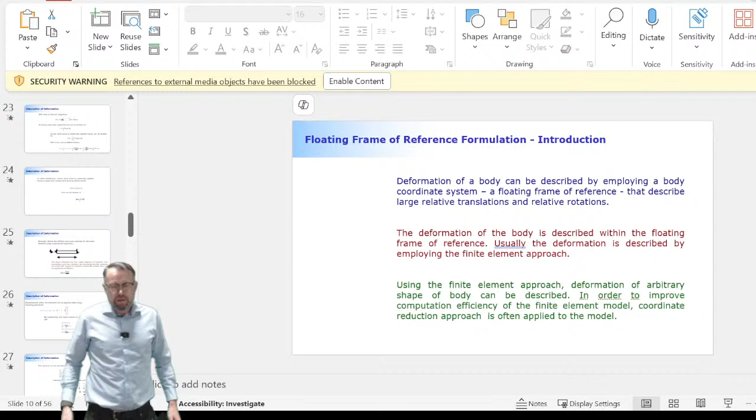Time online. Can you start sharing? This one. And is dock 1. How is it? The voice is good. In the meantime, can you stand up so that... Sure. Is it okay? Yeah, look so. Maybe you can lift that a bit more, so it's going to be like this one only. Yeah, okay, it looks good. Is everything okay? Yeah, everything seems to be okay. I'll just go grab something.

So, I have checked it. Everything seems to be in order except that I'm unable to display my screen to you guys. But these projectors, I think they're not even on. So we're good to go except that I'm unable to display my screen to you guys. Why not? So Mustafa left. Wireless. Okay, dock 1.

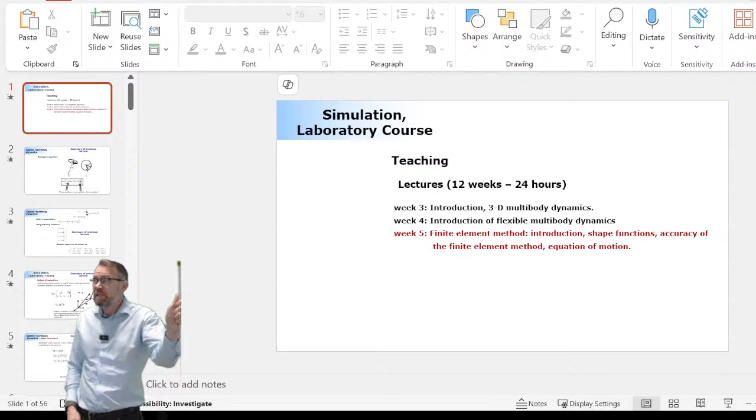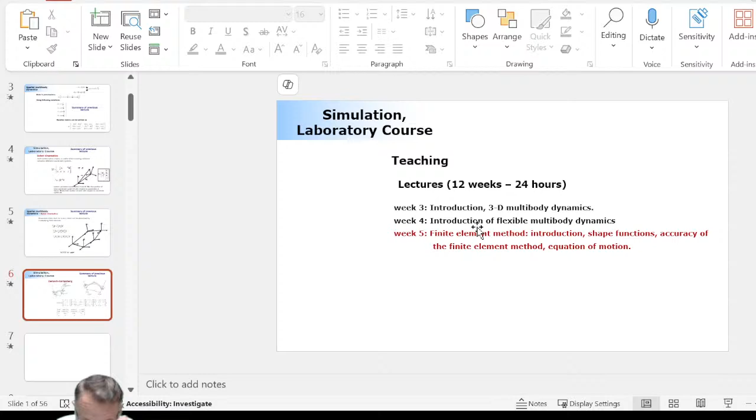The slides are frozen. So starting from where? The first page. First page. Okay, so let me take a look. Discard. It looks okay here. So let me put this back. So was it? Now it's okay now. Okay, but I need to detach this. Put it back. And like this. How it displays. Now I can see your cursor moves around. Your mouse, I can see it moves around. Okay. Here. Can you see this?

So is it moving? No, it's still on that. Still in this one, yes, but there is a delay. How come it's not in this presentation mode? Because everything else seems to be okay. So what if I do this? Is it somehow the video capture device? Everything should be okay here. As far as I can see, I don't see any difficulties here at all. No, this is what I don't want to do.

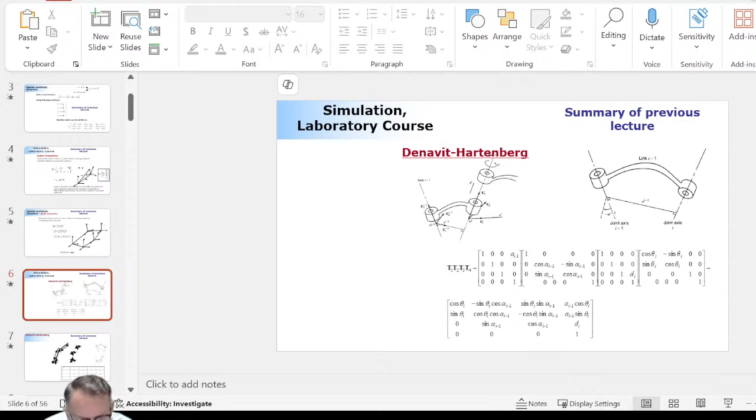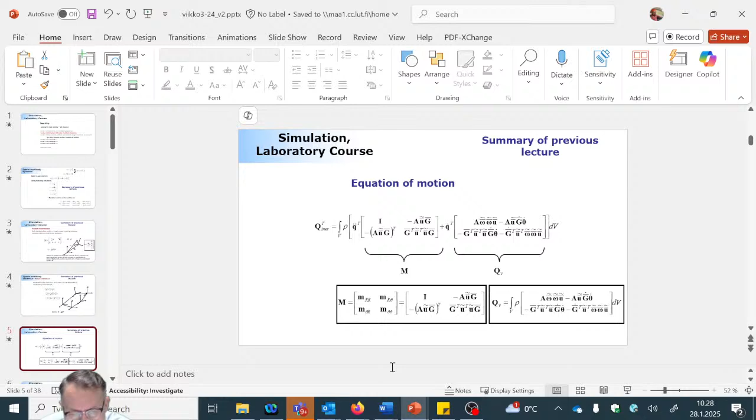Okay, so one more time. What is it you can see there? Denavit-Hartenberg. How come it's possible? Because my slide is completely different. So what is it you see now? Still the same. Okay, guys, sorry about this. So it seems that we are not able to somehow change the slides in PowerPoint. So the OBS is somehow video capture device. Display, what if I do the display capture like this? Window. Okay. How about now? I can see OBS. Now it's okay. Yep. Okay.

Okay, guys, sorry about that. I know it is a little bit annoying that every now and then I'm facing these difficulties in YouTube streaming, but I still want to go with YouTube because I feel it is superior. Another day I was checking my lectures, which I usually never do, and it's so convenient that you can put the closed captioning on. Even though I have an accent, it understands my English almost perfectly. And you can put the closed captioning to any language you want, including Finnish or German.

And it's still not displaying. Why? It was good a moment ago. It's somehow very unstable today. So it's again dark. I think it is somehow related to this display thing, that when I put it in this overhead projector, it's getting confused. So let's use this one more time. All right, like this. How does it look at the moment? Robot kinematics. Okay. Now it's fine. I think it is related to this projector business somehow.

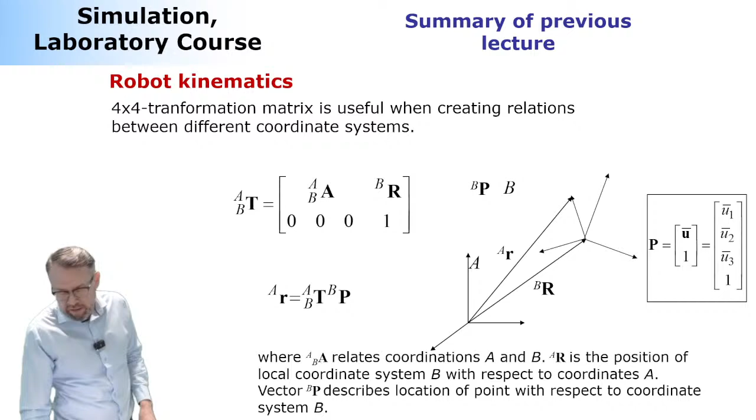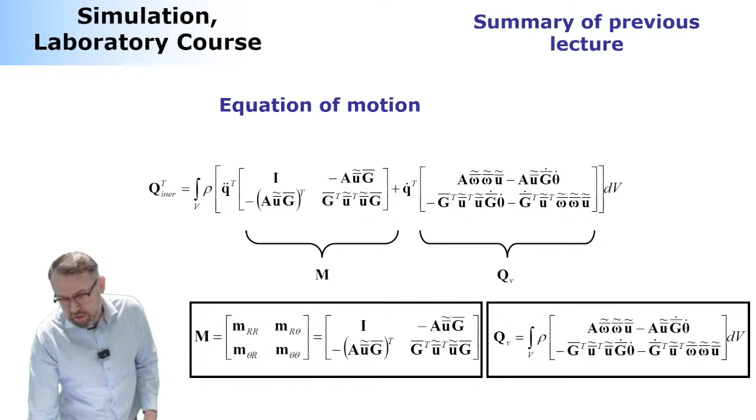So we were here to explain the 4x4 transformation matrix, and we concluded that you can create the kinematics based on that in a very straightforward manner. I'm going to revisit the subject matter a little later. We learned that we can relate the angular velocity vector and time derivatives of generalized rotational parameters with help of the G-matrix. The G-matrix is very pleasant in terms of usage in dynamic engines. It's needed because otherwise you'd have to express your inertia parameters, including your inertia tensor, using 4 parameters if you're using Euler parameters, and that's mission impossible for human brains. I'm going to revisit this just before we summarize our knowledge for the midterm exam.

Okay, but what I wanted to do today is this. Let's jump into the method called the floating frame of reference formulation. This is a great method used extensively in industrial applications and in most industrial companies, also in Finland. It allows you to describe deformation of bodies. How does it work? We're combining two methods: multi-body system dynamics and the finite-element method. In theory, if you are not happy with the finite-element method, you can combine this with something else, but in practice it's always the finite-element method. So that's what we're going to take a look at.

And we're going to make a short visit to the background of the finite-element method, how it actually works, because in order to understand the theory fully, it's good to be aware of it. All right, so this is something we discussed a little earlier. The floating frame of reference formulation is a method where there are large relative translation and rotation. That is described by the body reference coordinate system, using multi-body system dynamics. Sometimes this is referred to as large rigid body motion.

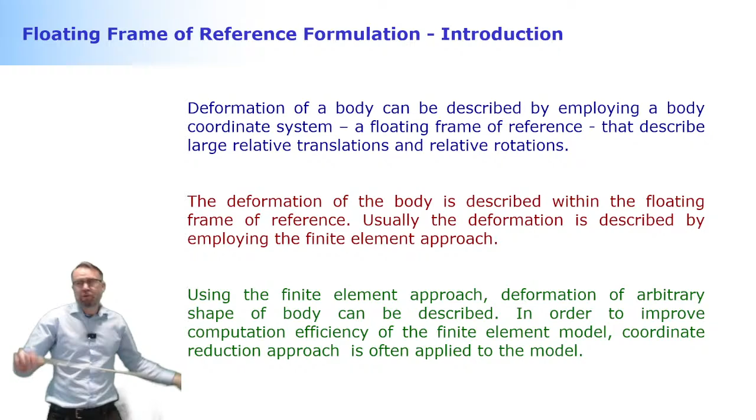The deformation that is superimposed on this large motion will be accounted for by using the finite-element method. And that's the way we can make use of the most positive things of the two methods. The finite-element method is very good at describing relative deformation with respect to a reference frame, whereas multi-body system dynamics is very good at describing large reference motion, rigid body motion, if you may. Okay, so that's how it goes.

And where this name floating is coming from, we're gonna get to a little later. But the theory goes like this. Remember, when we looked at the kinematics, we wanted to describe the kinematics using the body reference coordinate system, which is located here. So we're gonna first take the translation of the body reference coordinate system into account with help of our good friend called vector R. And then we're going to take the orientation of the body reference coordinate system into account by using the 3x3 rotation matrix that you can describe by using Euler angles, Euler parameters, whatever means you want.

And then comes something that we have not discussed earlier. We're going to describe an arbitrary particle by first taking its location into account using the position related to the undeformed configuration. When there's no deformation whatsoever, that's described by U bar 0. And then comes the last component that takes the deformation of this particular point into account. This deformation, of course, is a function of time and will be described by the vector U bar F. U bar F is the one that is actually coming from the finite-element method.

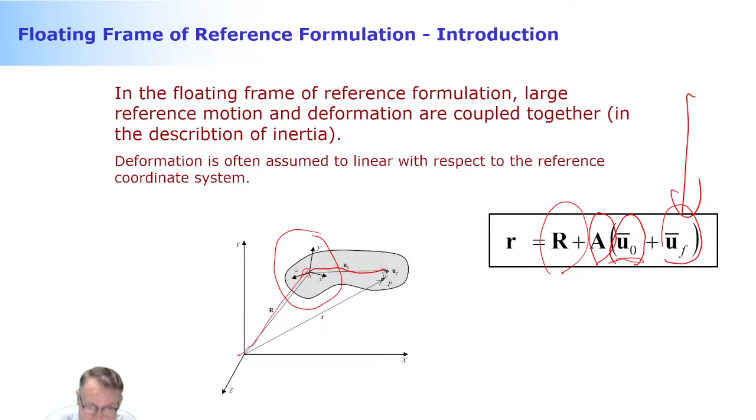Okay, so what's new compared to what it was a while ago? The new thing is this component here. Nothing else. And this new component is coming from the finite-element method, and it is describing deformation, displacement. So basically, if you think about a cantilever beam, when you're imposing force on it, the displacement is how much each given point of the cantilever beam has moved. So this is going to be vector U bar F. You know that this kind of deformation you can describe, or compute, using the finite-element method.

All right, here comes something very important. What we did in the case of rigid bodies, we took each of the particles into account by using volume integrals. We integrated over the volume of the body, and that's the way we were able to take all these infinite number of particles into account. When we are discussing deformable bodies, that's no longer possible because there is, first of all, an infinite number of particles and an infinite number of motion possibilities for each of the particles. And this is not going to be computationally possible any longer.

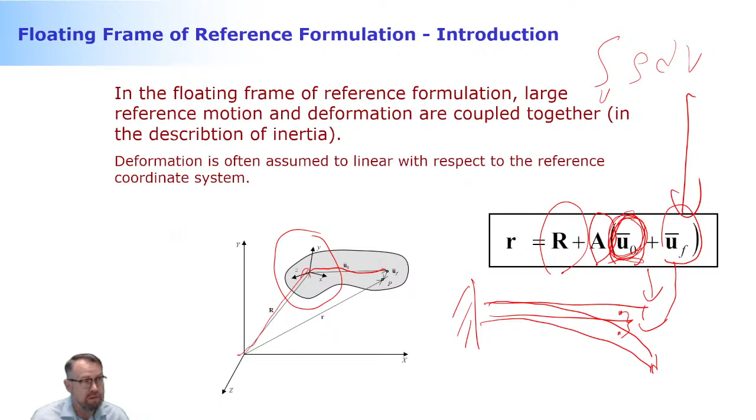What we need to do is limit ourselves to a certain number of motions, a certain number of ways that the deformation can take place. We still can take each of the particles into account, but the way they can deform needs to be limited, simply because we don't have the computational resources to take that into account. That's the reason behind it. Okay, so that's what we're gonna do.

And again, it goes like this. Here is the equation of motion that is used in multi-body system dynamics. And look at what we have here. We have these generalized coordinates which describe the reference translation and rotation, and Lagrange multipliers that take the constraints into account. So this is going to be our vector of unknowns. This is going to be supplemented by the finite element method, and in the finite element method we wanted to solve this vector as a function of time. That's what we wanted to do. How does that sound? The big picture is pretty clear, isn't it?

There's one big problem here, which we're going to revisit later, if not today, then a little later during the course. And this big problem is this: the typical size of a finite element model is enormous. It is not unusual that the finite element model describing one single body consists of 10,000 degrees of freedom, 100,000 degrees of freedom, 1 million degrees of freedom. So it means that the vector u bar f is very big, consists of a very large number of components.

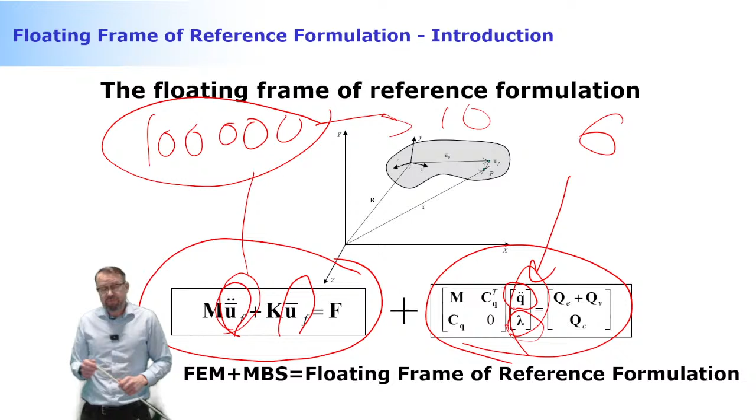Of course, there is a price we need to pay, and the price is that accuracy is not as great as it was with 100,000 degrees of freedom. But it's surprising that with this modal reduction technique, accuracy is compromised only a very little. So it's something that in engineering applications we can live with fine, even when we go down to 10 degrees of freedom. This is going to take place by using this modal reduction method, and we're going to learn to use it with the help of eigenvalue analysis. And eigenvalue analysis is more about the structural properties, the relation between stiffness and mass.

Okay, any comments, questions so far? How do things appear to be? Is it making sense, or does none of this stuff make any sense? It feels like we look at the same equations in different classes. This is good, but I feel like that's pedagogical. It is. This is the whole purpose. So you learn this in Jussi Sopanen's class, and then in Marko Matikainen's class. So do you guys have a feeling that you are not making any progress whatsoever, because moving from one class to another, the same equation comes again and again? Which is great. I know you're thinking, why is this such a big deal? But once you understand the nature of this technology, everything is going to be easier after that.

So one more time, there's Sopanen's class, and then control system. Control system, what course is this? Machine Dynamics. But what is the other course? This is something I'm not familiar with. In control, there's eigenvalue analysis to find the stability. Right, but is it for rigid bodies or flexible bodies? I think it is for rigid bodies. So it's a little different story, but again, a little bit the same story too. Okay, how this all comes together. Hopefully you'll feel super strong after you have heard these stories. What he is explaining is more or less the same.

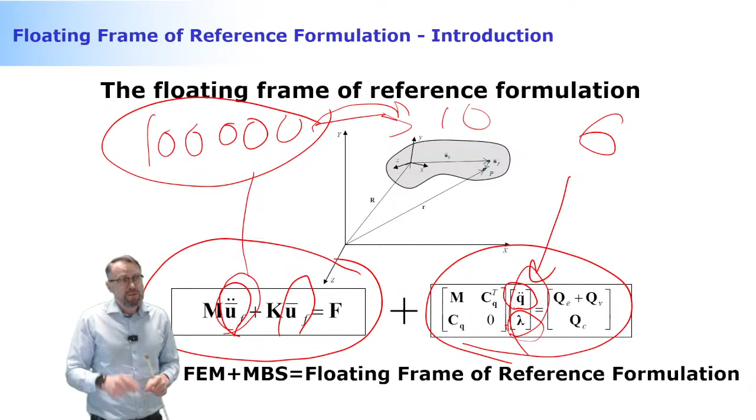He is moving from one space to another, because moving from 100,000 degrees of freedom to 10 degrees of freedom is moving from one space to another space. So this is a space mapping. By the way, his middle name is space mapping, you know that. He's very, very good at that. So Sopanen uses space mapping, mapping from one space to another all the time. Here we don't do that much mapping, but a little bit too.

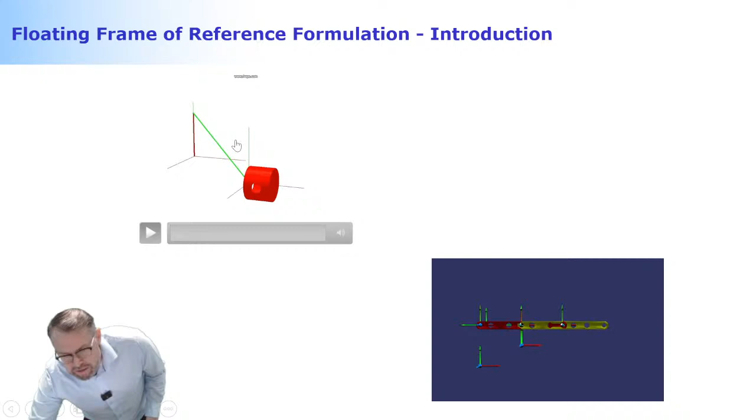Okay, so here are a few examples of the floating frame of reference formulation that I haven't shown you earlier. These are the early developments we made. This is a three-dimensional crankshaft, and you see that the connecting rod is a flexible body, just for testing purposes. When we were about to look at the floating frame of reference formulation in detail, these kinds of exercises were used.

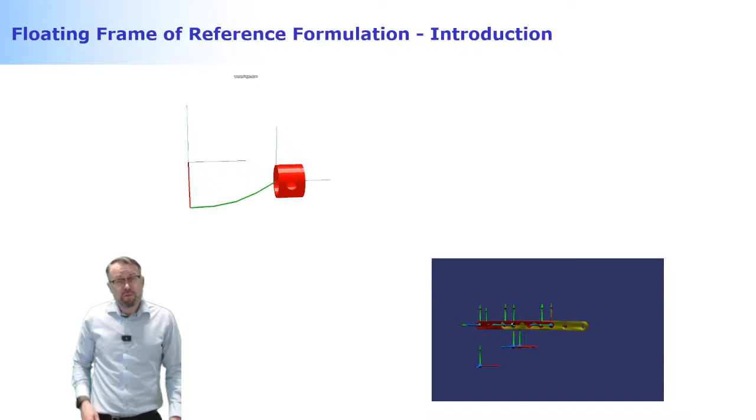And this is another system where there's a telescope joint, which even today is a little difficult to model using this technology, for reasons we're going to get back to a little later. But you see that it looks pretty realistic, so it's not too much off. Okay, deformation, U. How can you describe this U bar? It was called U bar F.

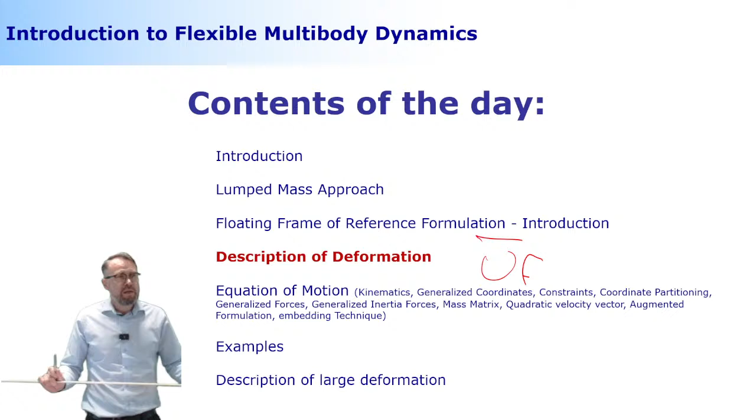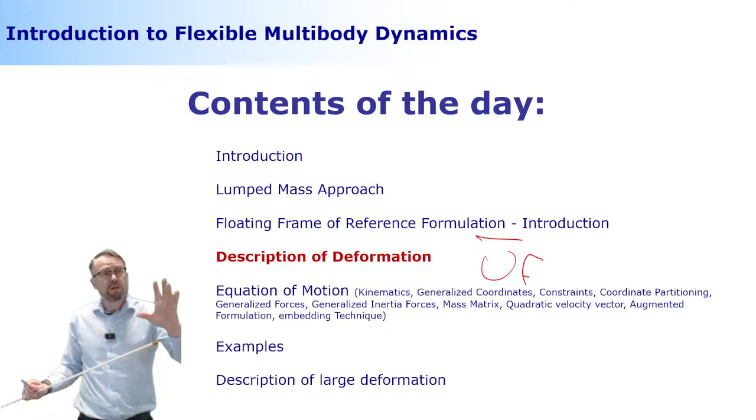For sake of simplicity, we're going to start calling this U. This U is always going to be with respect to a reference coordinate system that takes large translation and rotation into account. From this point on, we're going to look at how the deformation can be described, without making any comments about whether that coordinate system is moving or not.

We're going to look at the finite element method, which is extensively used and very general, applying to multiple different engineering areas. Here we're going to use a displacement-based finite element method, meaning the unknowns will be displacements. There are other methods, such as in fluid analysis, or mixed finite element methods where unknowns include quantities like stresses and displacements simultaneously, giving slightly better approximations of both.

But now we're going to look at something displacement-based, focused on U - how much or how well we can describe deformation. The method itself is pretty simple.

You take your structure and divide it into what are called elements. These elements are connected to points that are called nodes. The more elements you have, the better solution you get.

This is the nature of an approximate method. Typically, when you have a low number of elements, your solution is not great. It gets better and better as you increase the number of elements. This is called convergency, or convergency rate.

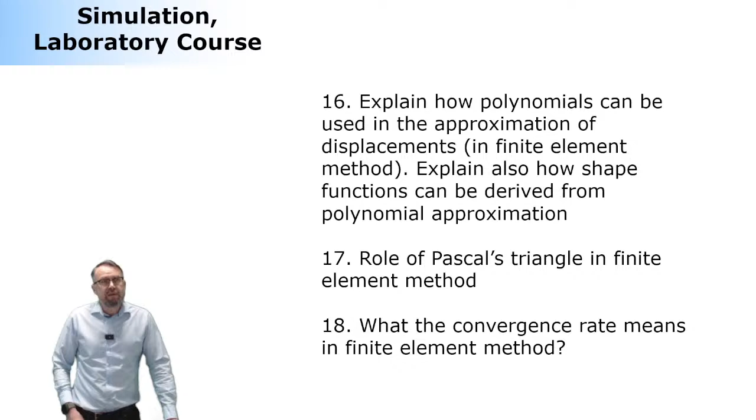We're going to take a look at polynomials, because we can take each of the particles in flexible bodies into account, and how we do that using the finite element method is based on polynomials. Related to polynomials is Pascal's triangle - what's the deal with that? And we'll look at convergence rate - how fast you can get a solution you're happy with.

Now let's get started from the very simple element - the spring element. A spring element consists of two nodes, two points at both ends of the spring element. These nodes can be located where you're combining one element to another, but they can also be located inside the element. It's very possible to have one node in the middle, or even three nodes in the middle.

This is possible too. This element is something that this one node, U1, can move back and forth in the x-axis direction. Nothing but motion like this. Here's another node with the same kind of degrees of freedom. Each of these points consists of 1 degree of freedom, meaning there's only one way they can move. They can move positively or negatively, which is another direction.

Now comes something extremely important. We wanted to learn how is the behavior between these nodes. This is the nature of the finite element method. We really want to know how each of the particles, and there are infinite numbers of them, are moving between these two extreme nodal points. That's what the finite element method is about.

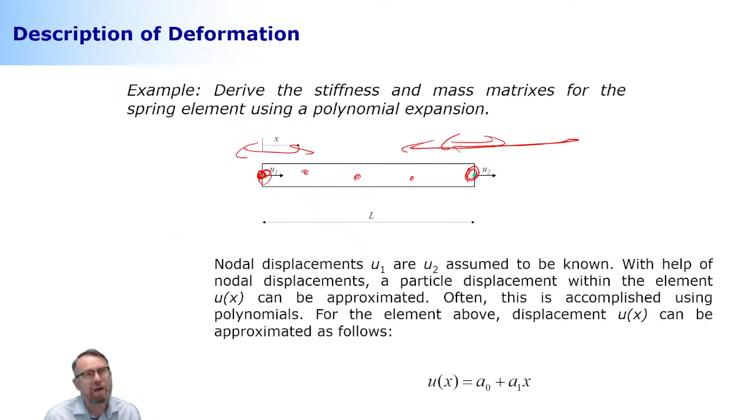So what can we do? We can approximate these pretty much any way we want, and there are many ways to do that, but the most common way is using polynomials. A polynomial describes the internal life between these nodes. Let me emphasize again, finite element method is all about how is the life between these nodes. That's what we're interested in. This gives us the feature of each component that will later be used to compute displacement, stiffness matrix, mass matrix, and so forth. How is the life between?

Now it's going to be pretty simple. We have one node here, another node here, so we have a total of 2 degrees of freedom system. The way we can approximate this using a polynomial is this: a continuous function that is a function of x. This continuous function consists of two components, A0 and A1, and A1 is multiplied by x.

Now how would things be different if I added one more node here in the middle? It would be 3 nodes, so it would be a 3 degrees of freedom element. What should I do to describe an element like that? I should add one more component, A2, multiplied by the next polynomial term, which is x power 2.

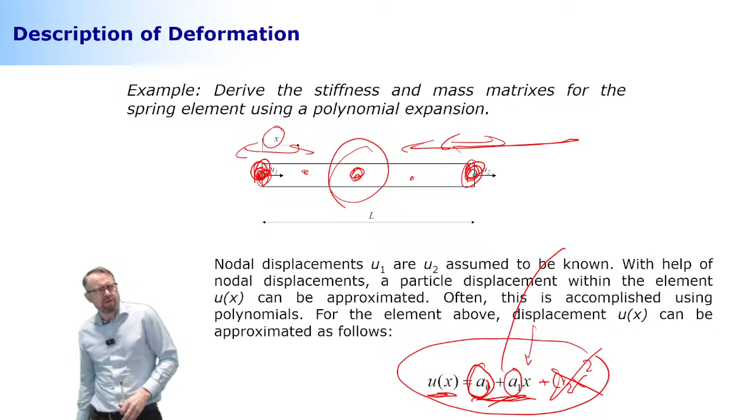How can we make things happen? Maybe we can make use of the information we have about how the nodes are located, and use this information to create something where the polynomial unknowns are replaced by nodal degrees of freedom. It goes like this: I'm going to express this polynomial using two vectors, one of polynomial coefficients, another of my unknowns. Let me emphasize, you could take these A's and go all the way to the stiffness matrix and solve the problem using these unknowns, but again, they have no clear physical interpretation. So it makes sense to do a certain level of manipulation here in the beginning, at a kinematic level.

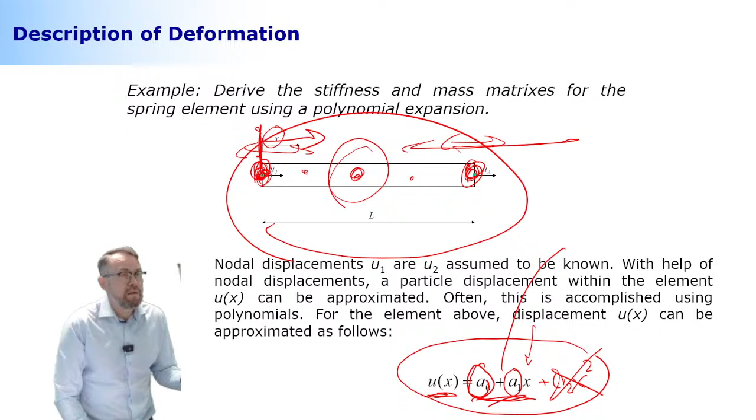What do we know? We know that the first node is located where x is equal to 0. How do I know that? Because when I look at this x coordinate system, it starts here, so it's located where x equals 0. How is it going to look if I substitute that information into my polynomial? If it's originally written like this, and you substitute 0 here, this component will disappear. What is left is this one.

All right, then I will do the same, but this time x is equal to L, because I know that the next node is located at position L with respect to the origin of the coordinate system x. So this is going to be my substitution. So what if I'm going to express this similarly to this one using...

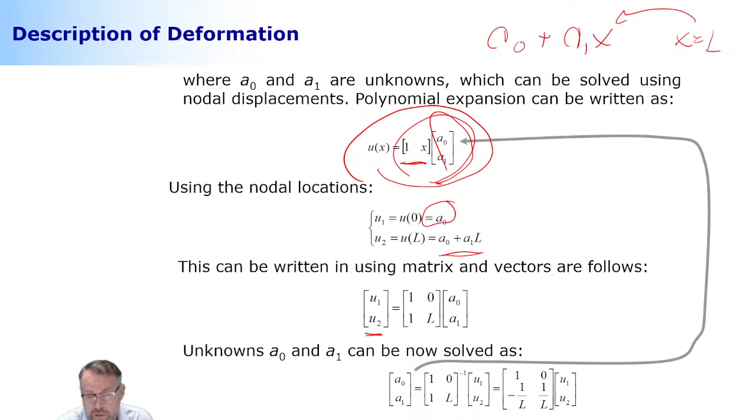the matrix notation. So U1, U2 can be expressed using these unknowns, the A's, and then something that is a matrix that we're very much interested in. Now, the only thing left here is to solve this and substitute that back. And then we're going to understand how each of the particles between these nodes is behaving. To make that happen, I need to invert this, which is a 2 by 2 matrix.

Let me tell you a horror story. When I was a postdoctoral student at the University of Illinois at Chicago, UIC, one of the first things that was my responsibility was to create the shape function matrix, the same thing that I'm doing here, for an element that had a total of 48 degrees of freedom.

I'm never going to forget the number 48. Instead of 2 degrees of freedom like we have here, it was actually 48 degrees of freedom. So what does that mean? It means that this matrix here wasn't 2 by 2, but 48 by 48. So it's much bigger than that.

Seemingly simple approach to do, because already back then, when I was younger, I had access to symbolic math tools. So I was able to use the symbolic math tools to create this, and more importantly, invert it, because otherwise inverting this by pen and paper, inverting a 48 by 48 matrix, no go. No human can do that. Maybe somebody can, but you'd need to devote a lifetime to do it once.

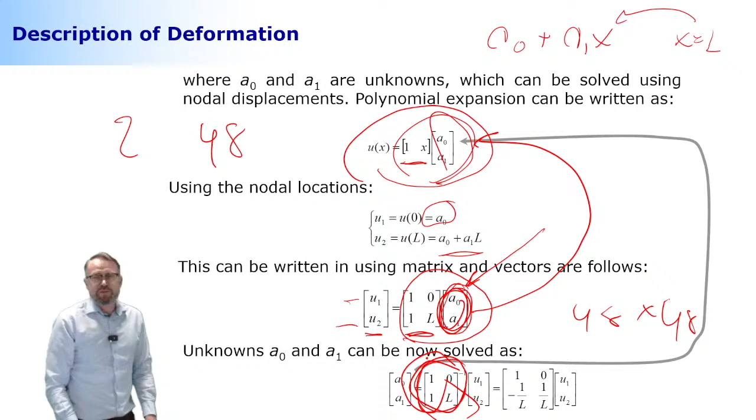All right, so you don't need to struggle with anything like that. Once I do the math, once I do the substitution, I'm going to get 2 components. I'm going to get the vector of 2 components, and these 2 components are continuous functions - continuous functions that tell me how each particle is moving if I make a move of one of these nodal degrees of freedom. So this is the soul of the finite element method.

So let's look at this again. I have node 1 and node 2. If I move node 1, these shape functions - while I keep node 2 where it is - tell me how every single particle between these points is moving. And this is what the finite element method is all about.

I understand it's hard to understand this concept because we're speaking about an element that can only move back and forth at this nodal location. But if you move this one here by some amount, how do the particles that used to be located here move with respect to each other? And the motion is linear - you see there is linear behavior.

But not necessarily - this linearity comes from the fact that the polynomial I used was very simple. This becomes more clear when we look at this in a beam application, because in beams we have more degrees of freedom. But this is the soul of finite element method. If you don't know how each of the particles is traveling between these points, you would have no chance to use this in a proper way.

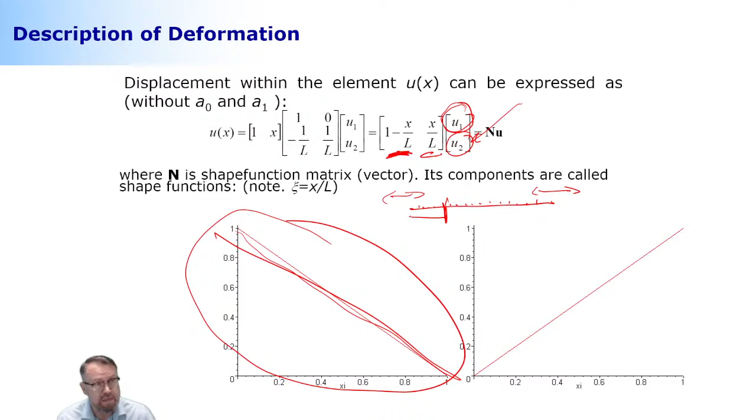Now, I say polynomials are most commonly used to create these shape functions, which is correct. But not necessarily. Some people are not happy with the polynomials. There is even technology that was somewhat in fashion a while ago, called isogeometric analysis. And isogeometric analysis, instead of using polynomials, uses NURBS, non-uniform rational B-splines. Why? Well, there's a clear reason.

Because one of the things that in real use of the finite element method takes most of the time is meshing. Meshing means that you have a geometry and you want to divide this geometry into elements. Of course, each of the commercial finite element programs has an automated way to make this happen. But usually you need to do this several times because there may be certain details that the meshing tool gets confused by. You're not able to make a proper mesh, so you need to go back and forth with your finite element and CAD software, and this usually takes more time than anything else.

And now when you look back, how does the CAD software describe the different geometries? They are based on NURBS, non-uniform rational B-splines. And now if you use NURBS in your finite element method, then the conversion from geometry to finite element mesh becomes more straightforward, and you can save time in the meshing phase. Other than that, everything works with no difference. So this is what is called isogeometric analysis.

Okay, so what next? Yes, sir. We now have a system with 2 degrees of freedom. If we have a system with 48, we get 48 of these diagrams, right? Yes. Okay.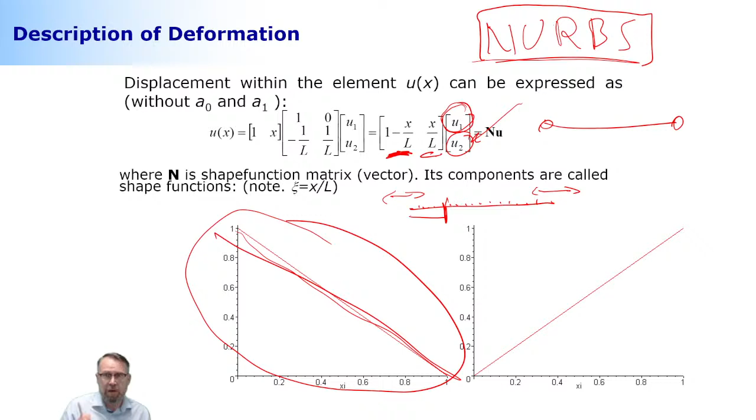Okay. Yeah, so this particular element here, even this one, you can make it 48 degrees of freedom, if you do it in a way that you have 48 nodes, so this becomes 48 times 48. Not necessarily making that much sense. And by the way, in the finite element method, something that is good for you to be aware of is that there are 2 different refinement methods. Like the one that I explained here.

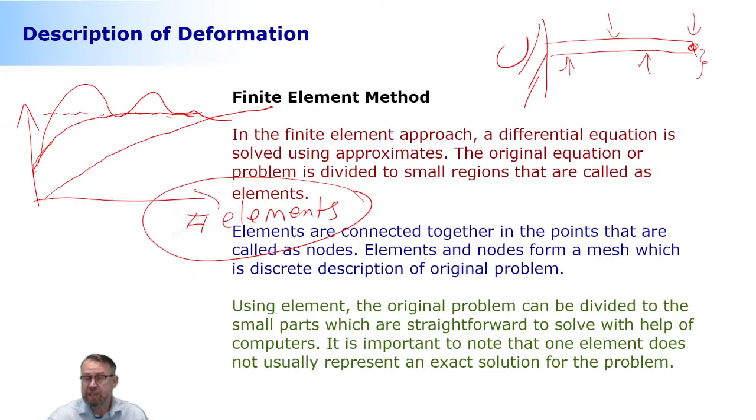I said that you can get a better and better solution if you increase the number of elements, which is correct. But you can also do it the other way around. You can also increase the degree within one single element. Now we use these linear polynomials. Instead of using linear polynomials, we can use more advanced polynomials and increase the complexity of one single element. These are called p and h refinement.

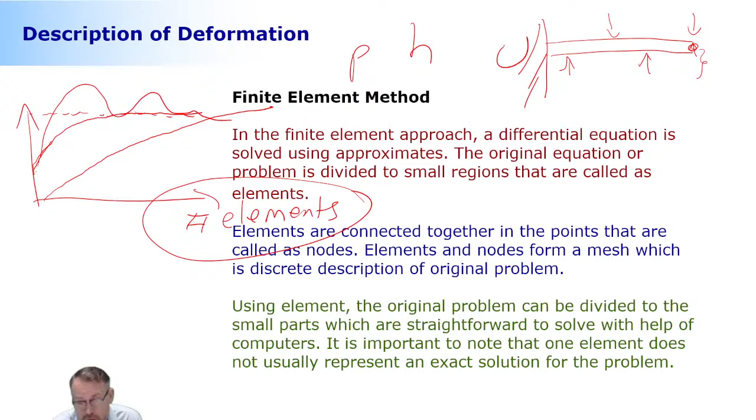P and h refinement. So if you look at the finite element literature, you can get a better solution in 2 alternative ways: increase the number of elements, or increase the degree within one element. More or less the same story. Both come with a computational burden; they both require more computational power. So it doesn't really matter how you do it, because it's going to increase the computation anyway. But p and h refinement, that's what it is called.

Okay, so I was here. Look at this. 4 nodes. If it is 4 nodes, how is the polynomial going to be? How can you select the polynomial if you have a configuration like shown here? It's going to be 1, 2, 3, 4 nodes. Each of the nodes has 1 degree of freedom. So go ahead and log yourself into Socrative and enter the answer. And the one who was saying that I'm unable to log in should be able to log in now.

So the one that was communicating with the big boy, big muscle, Mustafa. Because now if you call me big boss, I need to call you big muscles too. This is a 2-way road.

You know that. Okay, so which one is correct? Only one is correct. Only one can work in this configuration. Okay, which one works?

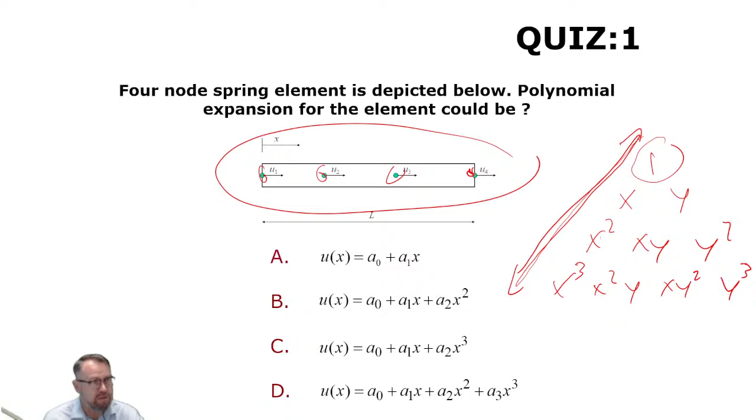Okay, now we are here in one dimension only. So in Pascal's triangle, we're using one line only, moving back and forth in this direction. So this is how we're selecting the polynomial components. The typical way to select the polynomial components is that you select this one, and you actually have to do it. If not selecting this one, the element is unable to describe large translation and rotation without introducing strains, and this is going to be physically incorrect. So you have to select that. This is a minimum component that you must have.

Second one here, if you have a line, you have to have the x, because otherwise the element is unable to express constant strain. And constant strain is another important feature, because even when you have a distribution that is a very, very complex form, you can always look at that in small pieces that are constant. And this is another requirement to make the element converge to the correct solution.

But then comes something surprising. Often these polynomials are selected, okay, the next one is this, and so on and so forth. But for some of the well-performing elements, you don't do the selection like this, but you skip some of them. That was, by the way, the story with the one where I was able to finally find the shape functions, the one that was based on 48 times 48. So it wasn't that I was selecting everything here, because that would be the easy thing to do. But it was this one, and this one, and then all of a sudden it works, and it's performing better than anything else.

And this is something that we're going to discuss a little later: conforming and non-conforming elements. The selection, like taking everything in a line, is a very obvious choice, but not necessarily getting the most efficient elements.

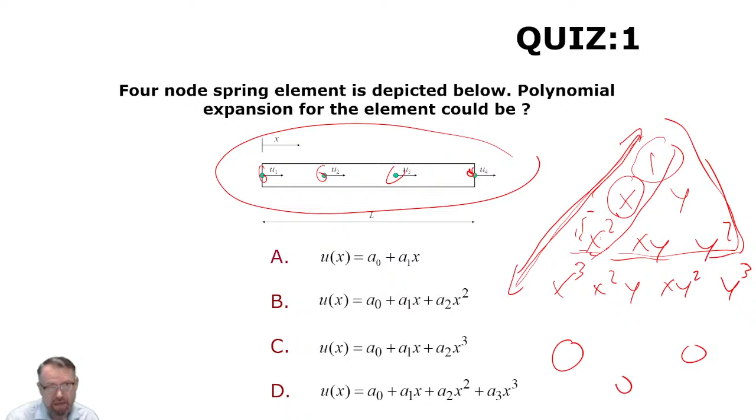Okay, I'm going to get back to this momentarily, but let's look at how we can describe the element then. This is something that I don't think is very important here to understand in detail. But what I wanted to do is express the equilibrium in a sense that I have here external applied forces and then the stress that I'm integrating over the boundaries of the element. This is a little complicated way to express the whole thing. But what I wanted to have here is strain, the strain vector. And I wanted to know how the displacement and strain are related. This is what I need to know to be able to create my stiffness matrix.

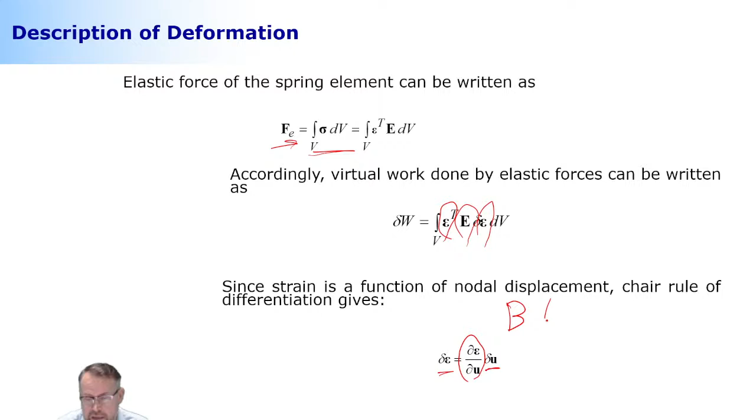The one here in the middle is going to be a matrix or scalar of elastic coefficients. Here is my strain vector again. The strain vector, in this case, can be obtained if you know your displacement, and this relates displacement and strain. This is typically called in finite element literature B, the kinematic matrix. The kinematic matrix relates displacement and strain. So if there's this amount of displacement, what that means in terms of strain.

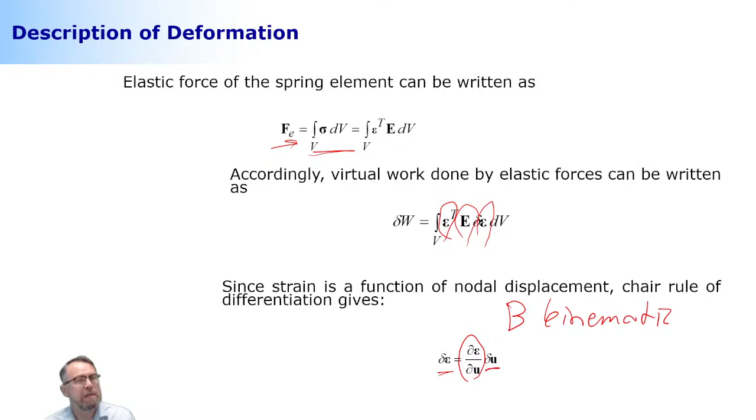All right, here the relation is this. I'm differentiating this vector u with respect to x. It's going to give me strain. And when I substitute the shape functions and degrees of freedom here, this is the way that relates my strain and displacement. This is the one that is called the kinematic matrix, doing this relation for me. Okay, so why is this important?

Because now if I have the displacement here, it tells me how is the strain, and the strain, again, is something that I must know in order to be able to express my stiffness matrix. I went a little fast here. I don't know if you guys have a little hard time to understand this, but the true nature of the finite element method is this kinematics. How you do this relation between the displacement and strain, this is very case dependent. And I would say that is less important than understanding the true nature that is based on polynomials.

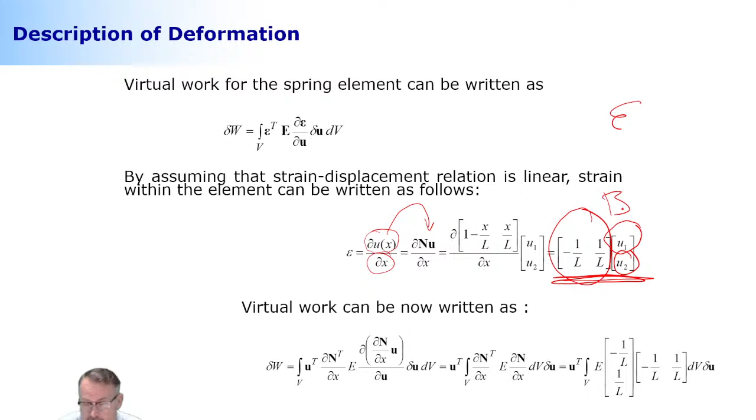Okay. Now, when I have this kinematic matrix and everything, once I finally compute everything and once I do the integration, what is going to be left is called the stiffness matrix. Now in a static finite element method, my stiffness matrix multiplied by displacement is going to be equal to externally applied forces. In finite element problems, we're solving this one. We're solving displacement by inverting the stiffness matrix and multiplying forces by the inverted stiffness matrix.

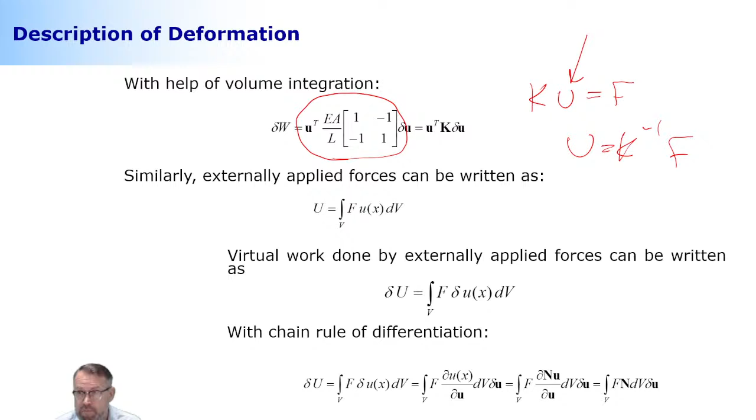Then you know the displacement, but displacement will be expressed in terms of nodal degrees of freedom. But with help of shape functions, we actually know how each of the particles is moving within the boundaries of the elements. Okay, we get back to this a little later, so we're going to look at this one more time.

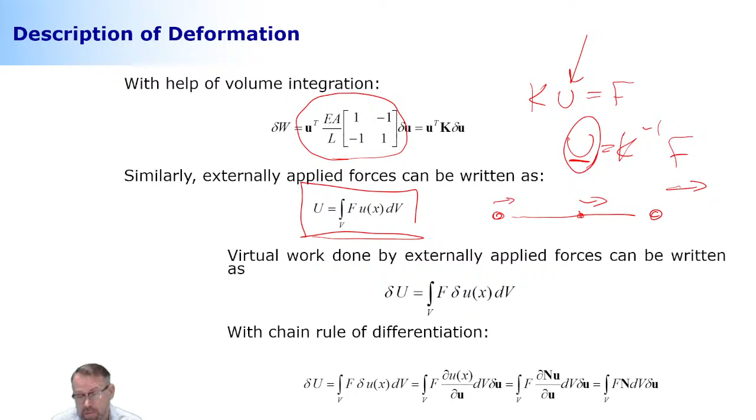And then one thing that is mentioned here is that these forces will be expressed in terms of nodal degrees of freedom, because your unknowns are these. So if you have nodes here, and the force is applied here, a place where there is no node, you need to share these forces to nodal degrees of freedom. And you can make that happen, again, with help of shape functions. Something that is less important here, but one of the minor things that is still very important to understand, like how you actually can make use of finite element models. All right, so this is finally what you get. So you're solving this one, which is a displacement.

I know for some reason I'm reluctant to have a break. I don't know why. Maybe because I'm not sure how well my ERC presentation is, but I think I need to do that. Okay, so what do you guys say? Let's have a break, and then after the break, 5 minutes, my presentation, and then we continue with this subject matter,

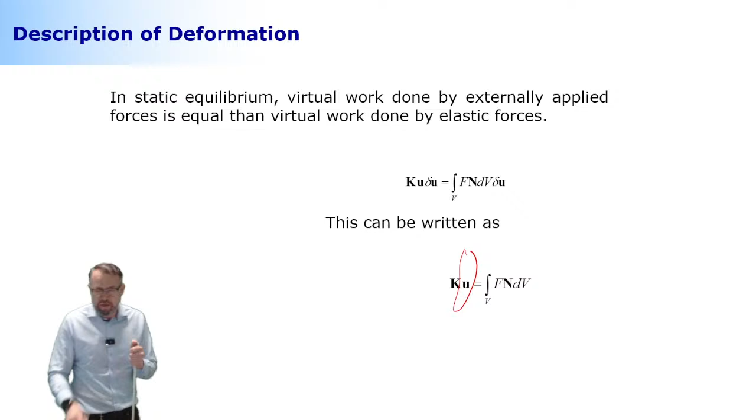but a completely different story. And it becomes interesting because now we're going to take a look at the beam element. The beam element is easier to understand because we look at the displacement in a transverse direction, up and down, and then the angle here. What kind of polynomials can be used to describe this kind of beam element? Here the answer is clear, because it consists of 4 degrees of freedom: 2 degrees of freedom in this node, another 2 in this node. So the polynomial describing the midline will be a polynomial with 4 unknowns. Must be 4 unknowns.

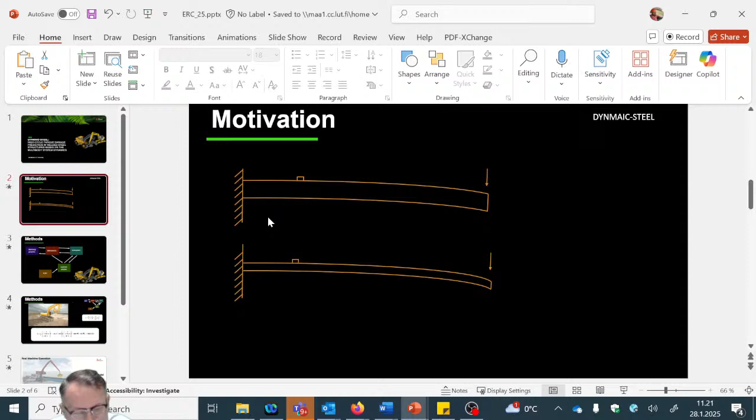Okay, how much do you need? 5. See you then in 5 minutes. This one and this one. And I think I'm back. Can you double check? Okay. I'm gonna be blocking this part of the slides, but I'm not gonna change the settings here. So let's put the timing on. 5 minutes is my presentation.

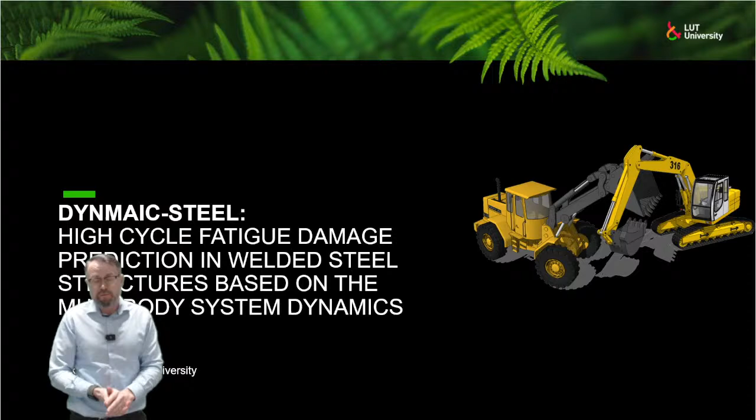Aki Mikkola, LUT University. I'm helping people to understand dynamics. And here I'm introducing the topic related to high-strength steel and how we can make better use of high-strength steel by tackling the problem they suffer from very severely. This problem is called fatigue. You know that there is a big desire to change heavy machinery to be lightweight machinery. And you can make it happen by using high-strength steel more extensively.

A big problem in high-strength steel is that the elastic modulus is the same as it is for conventional steel. That means that if you make structures more lightweight, they can handle the same amount of loading, but the deformation becomes bigger. And when the deformation becomes bigger, dynamics is going to be more severe than for structures made from conventional steel.

Very often, these high-strength steel and conventional steel too, when you look at how different components are put together, they are put together by using welding. And when you're welding two components together, you are always suffering from the severe problem called fatigue. And fatigue comes for several reasons.

First of all, because the welding process is a very severe process, it's going to introduce high residual stresses roughly at the location where the crack can start growing. And due to the welding process, the welding itself will introduce a lot of things that are not ideal, that are serving as an initial crack. Those two things make these structures very vulnerable to fatigue.

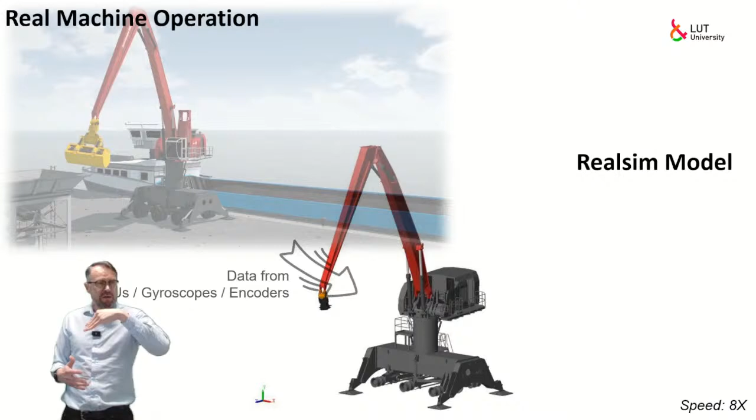And this is a kind of virtual strain gauge that tells us what the stresses and strains are at any given time. And this allows us to make it like a mileage gauge, where the mileage of a new machine is very high, and it's getting lower and lower depending on how the machine is being operated.

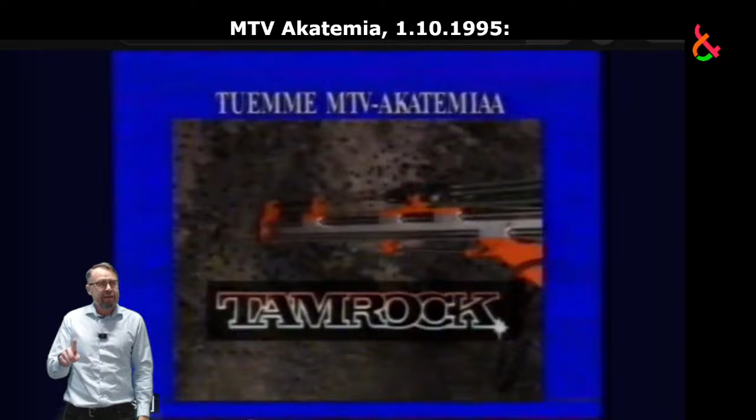I'm the optimal person to make this happen because I've been in the field already more than 30 years. This is a television show that was broadcast close to 30 years ago. This is me talking about the same subject matter. And you see that the mileage on my face is very high, but I've been doing nothing but this thing in my entire career. Okay, that's it.

My first practice. I see there's 4 minutes and 40 seconds. Yes. Okay. Okay, thank you. We do this every week.

What are the things that I need to improve? Yes, sir. No sound in the videos. Yeah, it's really annoying when there's video sound in the background when you're talking. It's really hard to understand. Yes. Okay, I need to make a note to myself. So the videos cannot have background noise. Yeah, I realized that too. But this was the first time that I practiced, and it makes sense to practice.

Also, this one, I don't think my voice should be there. My face can be there, but no voice. Okay. So the voice needs to be taken away from each of the slides. What else? Voice away from slides. What else?

Maybe, I think on your first slide, the motivation slide, you could include this with other pictures, because you talked about welding steel together and problems that come from welding. Maybe you can put a picture of a weld and the strength or the stiffness of the steel.

But you said something else, that I was speaking about this welding thing, but never really highlighted that there is something welded here. That was never mentioned. You seem to collect all the points. What else? What else?

Yes, sir. I'm not sure, but is the title correct in the upper right corner? Yeah. So in the first slide, I noticed that there is a misspelling. Dynamics here, or? Yeah, this is what they created automatically. So it's not necessarily something that needs to mean something, they just make the acronym automatically. This is what this system, this proposal is called.

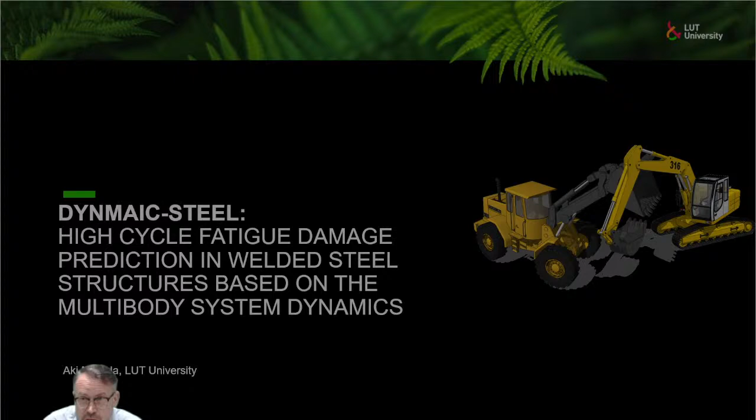Good point. Good point. Shouldn't there be the sign of the university on each slide? Each slide. So you want to take it away? No, to put it on each slide. Each slide, okay, in one spot. And the LUT logo on each slide. Yeah. Okay. Good. It's against Scott's advice. I think it is pretty good because it doesn't take that much.

So may I give comments as well? Yeah. The first slide is super empty. This one. Yeah, it lacks the elements of hooking your audience. Yep. So the second slide is no good. Personal preference, I would prefer to start a presentation with a question, so that you can grab my attention. All right.

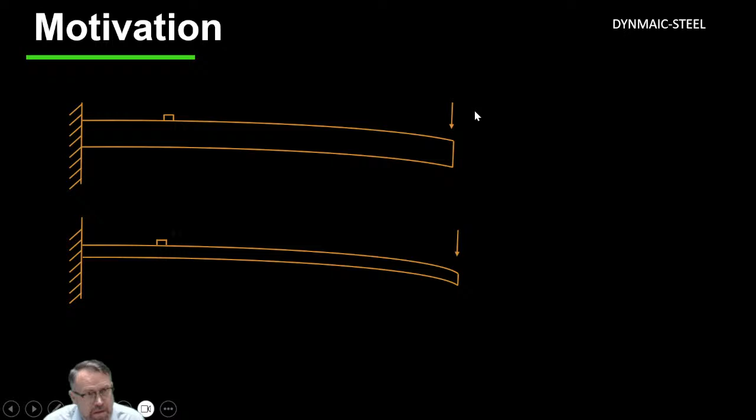A question, like why should I listen to you? Why should I give you my full attention? Question in the beginning. Yeah, you can just ask the question yourself, you don't need to write it. Okay. Go ahead. But for the first slide and for the element of seeking attention, it's super empty. Yep. I agree.

What about Team Finland? Any proposal? Yes. Was this for an EU project or what is it? No. This is something called ERC, which is European level funding. Will there be professionals in this field or just project managers? They will be professors, but not in my field. Maybe one or two could be in solid mechanics, but solid mechanics is a very, very broad area. The panel altogether is like 20 members. Many of them are fluid dynamics people, completely out of this field.

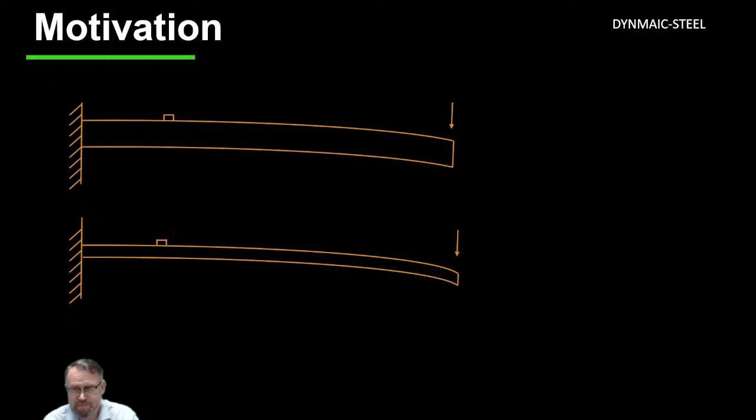Okay, but now I know roughly how much I can put into my presentation in these 5 minutes, and also the starting point, because that was also my question, whether everybody is from your field. No, they're not. For somebody who is not from the field of designing heavy machinery, I don't know anything about it, or why you should make this structure lighter. Okay. All right. Anything else? What about the later slides?

I recognize that explaining each of these equations is going to take more than 5 minutes. But the advice was that there need to be equations because they want to see the blood, they want to see violence. And the violent thing in our discipline is equations, and the blood is the equations. But I'm not sure if I use that, because as you pointed out, there are equations, but what the heck? And I'm afraid that if I started to explain each of these components, instead of 5 minutes it's going to take 5 hours.

And they're going to be not willing to give any money to me at all. Maybe to add a description into the slide, just to each component.

Yeah, like a word, something like that. But I need a mind map like structure, so we can connect each equation, what fits what - that's exactly what I need. I need to put, okay, mechanics this equation, hydraulics one equation each, not more than that. And then I can say this is based on this method, this method, and this method. I'm not going to go any deeper because obviously 5 minutes is not enough.

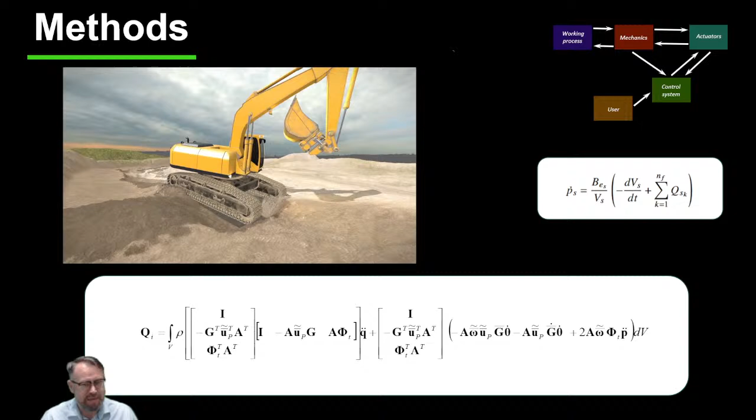Here's the funny thing - this interview is going to be 25 minutes in total. Something else, I'll take it afterwards. You have an opportunity to give a next round of improvements, not next week but the week after. So we're going to go over and over again. Hopefully I'm getting started on my lectures by this. And if we're going to win, this is going to be a great thing, which we'll all celebrate.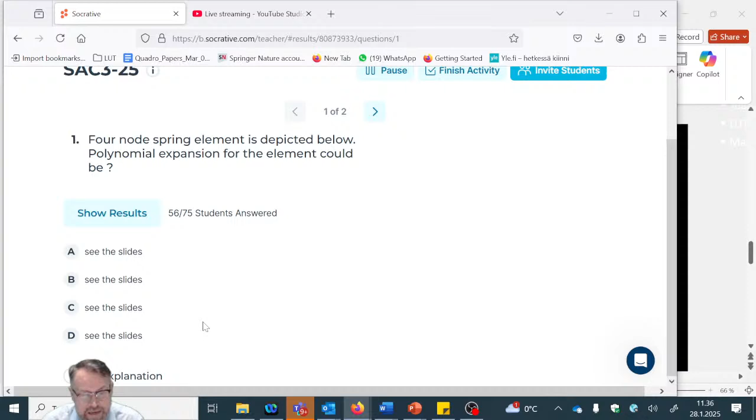Okay, how is the success rate here? So we got 56 answers, which is a good number. Is it going to be 100%? Okay, 100% or not? I'm thinking it is. Not exactly, but very close to it, very very close. Yeah, not bad at all.

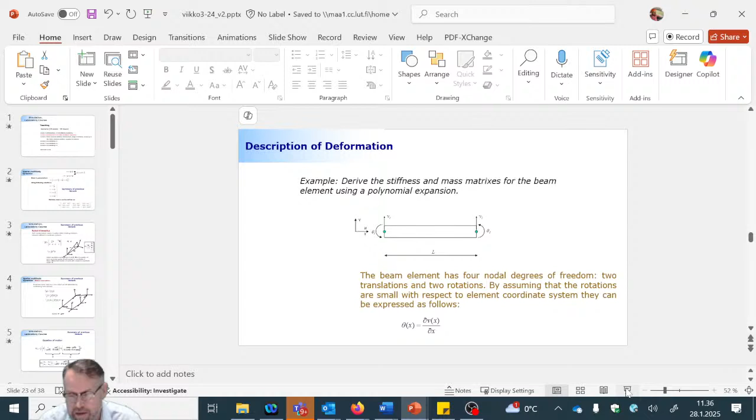Okay, here's my lecture. So let's go back to this one. And again, I wanted to focus on the kinematics. I need to do this - sorry guys that I need to do this one more time.

You guys also can say that you don't want to participate if you feel uncomfortable about this ERC business, but it's a big deal because this level of ERCs in LUT has no winners so far. So I'm pretty convinced I would like to be the first one.

What is the ERC? It's like European Research Council. Yes, so if you get this, you get the funding for something? Yes. So it's like 2.5 million at stake. And not just that, it's more than money, it's a reputation, because this is extremely hard to get. Only the professors that are thinking too much about their performance apply, like me. If you think you're average, don't even bother, because the competition is so severe. But I think highly about my performance, and that's why I even applied. Usually it's not that many applications, and each applicant is very capable, very capable. So it's hard to get it. But we'll see, we'll see. More than half will be declined after interviews, so it's still uphill, it still continues.

All right, okay. And now another element - altogether another element, which is a beam element. And like I said, now this is more clear because now we're looking at the displacement in this transverse direction. And we're going to describe the displacement in the transverse direction, this direction, as a function of longitudinal direction.

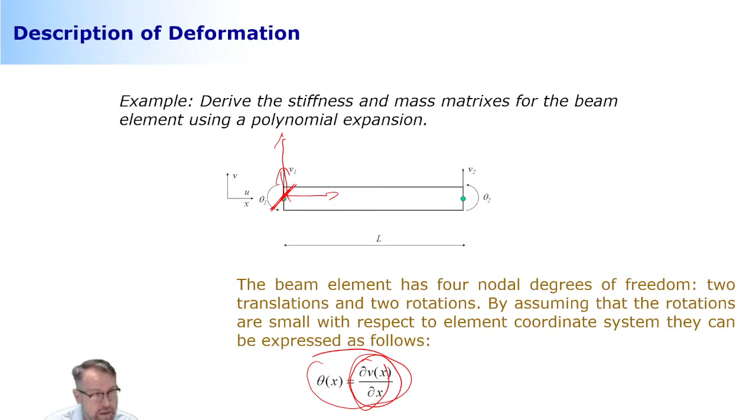Okay, so that's what we do. The first thing in this element is to select the polynomial. You see that I'm selecting conforming polynomials because look at this - I have my 0, 1, 2, and 3 selected exactly in the order that Pascal's triangle is telling me, so I don't make any shortcut. But next week I'm going to show you what it means if instead of this I select, for example, A3 to be x power 5, which I can do. I can do that. So it's going to... yes?

Maybe a stupid question, but I don't understand where you get the A1, A0, A2, A3, the whole line thing. Okay, so it comes - okay, that's a fantastic question.

It comes from the fact that the number of unknowns here need to match the degrees of freedom of your finite element. That's where they're coming from. The only thing that really matters is a number. The numbers need to match.

So if I, for example, have an element like this that consists of a total of 3 nodes, and each of the nodes consists of 2 degrees of freedom, which are displacement in a transverse direction and then the angle. So this would have 6 degrees of freedom. So then I need to select this polynomial expansion in a way that there are 6 unknowns, because these A's, A0 all the way to A5, will be my unknowns.

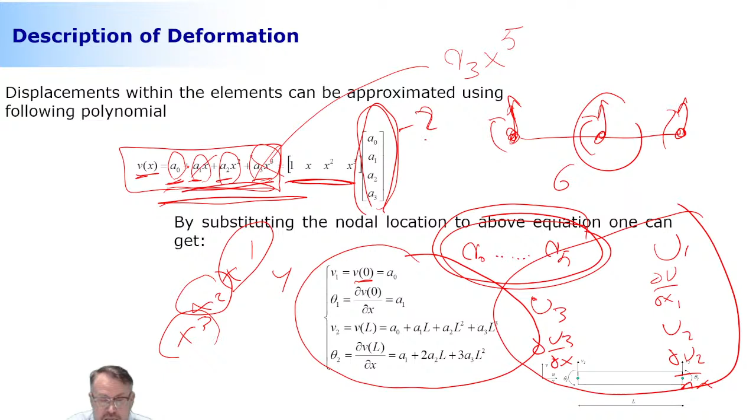So what I wanted to do instead is express these unknowns in terms of nodal degrees of freedom. How can I make that happen? By substituting the information that I know into this set of equations. The first equation is: when x is equal to 0, how does it look? All the components, this one and this one, will disappear. The only thing left will be a0.

Then I'm differentiating this with respect to x, and I do the same level of substitution. When I differentiate this with respect to x, this is the only term that will be left—sorry, that's a bit of a mess. Because I differentiated, it's going to be like partial vx over partial x. It's going to be a1 plus 2x times a2, plus 3a3x squared, like this. And if you substitute x equal to 0, this disappears, this disappears, and only this term is left.

Alright, then the next one: L. I'm going to substitute L in for x. This is the first equation that I'm going to get. The second one, which is differentiated, is going to be this one. Now I'm expressing this in terms of this famous matrix. Here is my nodal degrees of freedom, here's my matrix of coefficients, and this is my polynomial unknowns. Now I'm going to solve this to substitute this information here.

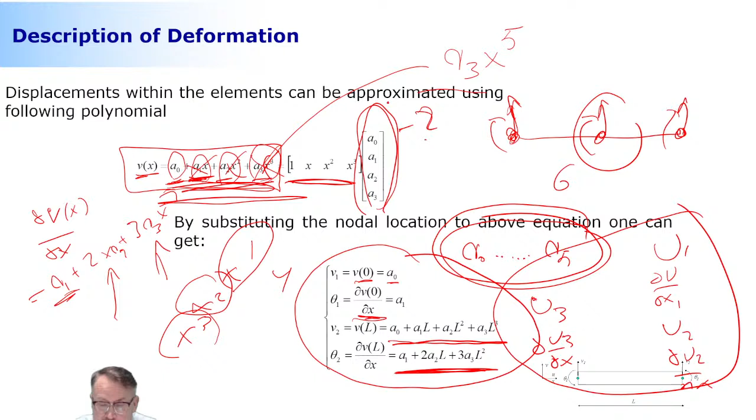Sorry, that is a big mess, but hopefully you're still able to follow me. I converted this by using symbolic math tool, so this is how it looks.

Now I'm going to do this substitution here. Look what I'm going to get. I'm going to get the continuous representation, what happens within the element, or within the boundaries of the element.

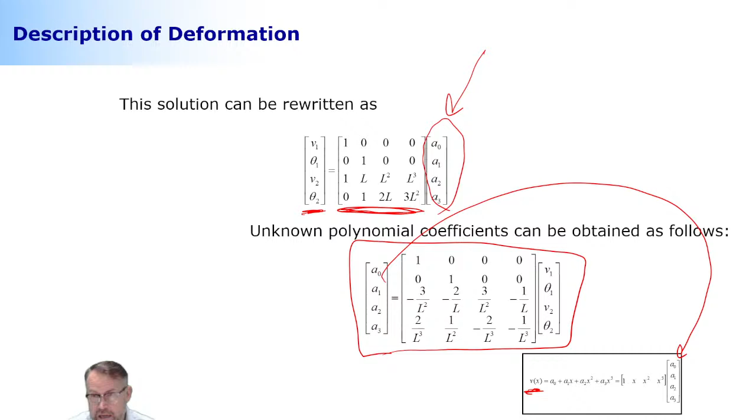What I'm going to get is 4 shape functions, and these shape functions are orthogonal in nature. Orthogonal means that they are not dependent on each other. And you can tell that when I plot them, because you see that the second nodal degree of freedom is angle.

You see the angle here is 0, the displacement here is 0, as its angle here is 0. So the only one that's nonzero is the motion in the transverse direction.

The second one is representing when you are having a moment here. You see that the displacement here is 0, displacement here is 0, and angle here is 0. You see that this is how they behave.

And what really matters here, now you have a continuous representation of how each particle is represented within the boundaries of the element. That's what we need to know. This is key information for the element technology.

And the same, which is symmetric, but another nodal degree of freedom. Here's a displacement in the y direction. This one is 0, this one is 0, displacement is 0. And this is rotation, but at another end, so they are symmetrical.

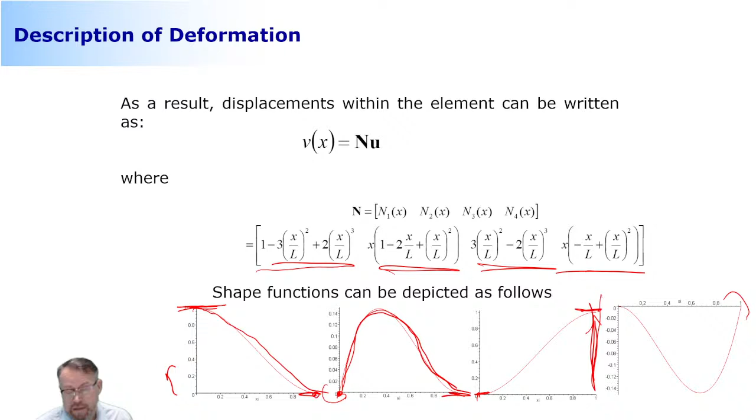Now, here's a relation, how is it that I can build a relation between the strain and nodal displacements. This is something that I need to explain in detail to you, how I did this thing. It's going to be next week.

But basically, I need to look at the midline here. I need to be able to tell how something like a curve that is perpendicular with respect to the midline behaves at any given time. That's what I need to know.

And once I'm able to express that, then I know how much one particle here, which is off from the midline, has deformed. That's what I need to know. And this is going to tell me the relation between the strain and nodal displacement.

Again, it's going to be something that is called the kinematic matrix. I know that this is all coming too fast, but we're going to take a look at this next week, and then we're going to wrap up the whole thing, because then you know the basics of the finite element method.

This is pretty much what you need to know about finite element method. If you understand this level of detail about the beginning of the finite element method, or let's say this polynomial expansion, you're very strong in the method. More than that, you'll be able to use a commercial finite element software and click this and that, but that doesn't tell you much about what the method is really about.

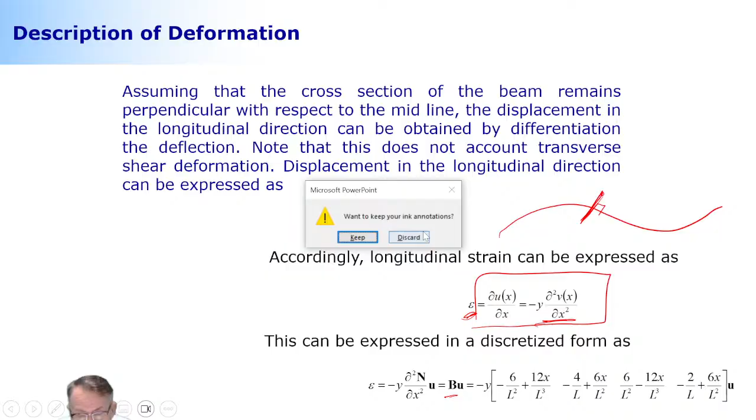Also about the presentation, one point about the thinking study, maybe when you present like 2 or 3 points, you can use your hands more clearly, like first point. Oh yeah, this is what we learned from another guy, that it's important to use hands. Yeah, it's important. Also, next time you need to watch my appearance. Seriously, because it's important too.

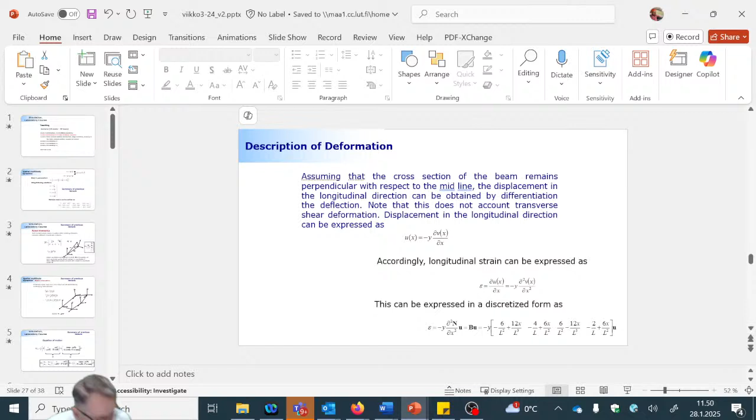Like, you're supposed to be standing like this and like this. You need to be confident, I was confident. I had an eye on this and it was clear, but you need to be super confident.

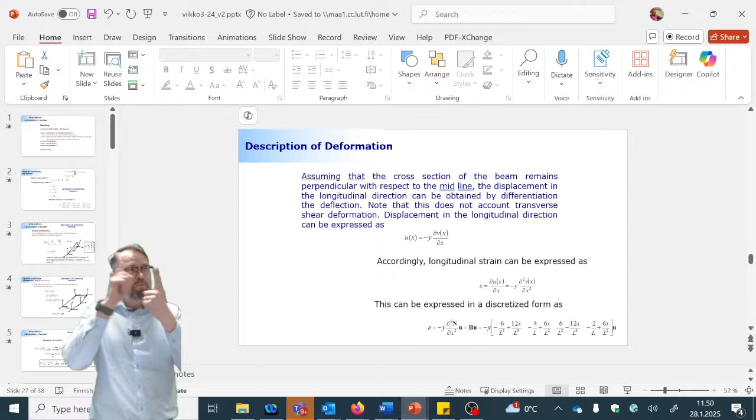Any advice, I appreciate that, and I think it is good. Like point 1, point 2, point 3, 3 things. Yeah, but we have 5, so we're stronger than him. Okay, thanks guys.